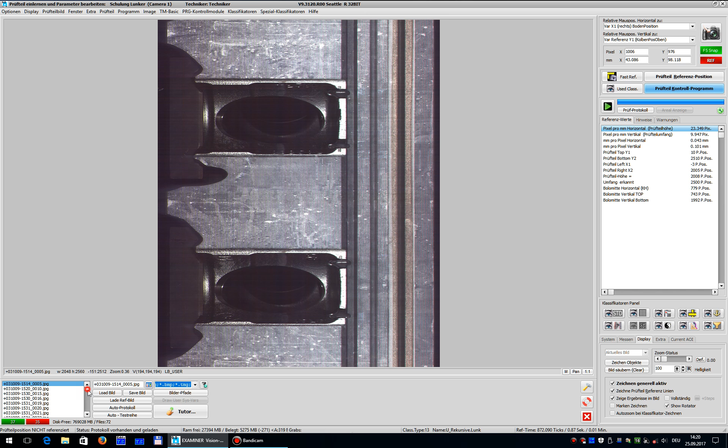Hello. In this tutorial I will show you how you teach with examiner 9 the Niring. In this case the Niring is good, he is inside the tolerances. I have three bad parts, bad pictures here in the list. I will show you the first.

You can see the Niring is not perfect. Here the Niring is very small, this is less than 1 millimeter, it's not good. In this area the ring is okay, but here you can see the ring goes outside.

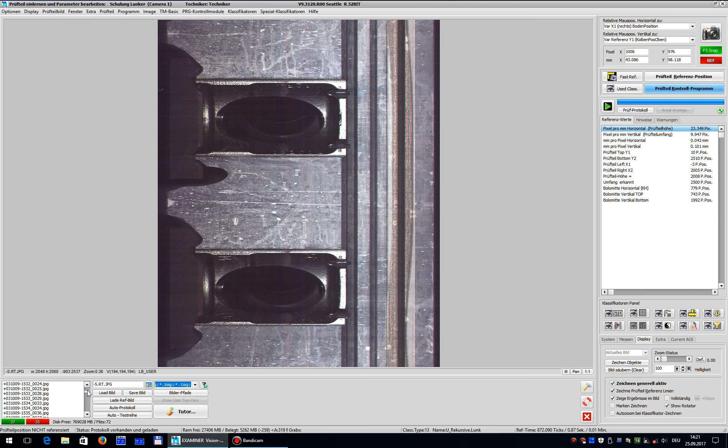Okay, the first thing you need is a good part to teach this. I'm loading a good part. In this case, in the list I have 37 good parts and 3 bad parts by Niring. First, I'm clicking to tutor.

Sorry, I'm switching to English.

Okay, I'm clicking to tutor. And here you have 3 options: teach a new characteristic, a new classifier; teach an existing characteristic, classifier already exists; and adjust existing characteristic. In this case, I'm creating a new one, teach a new characteristic.

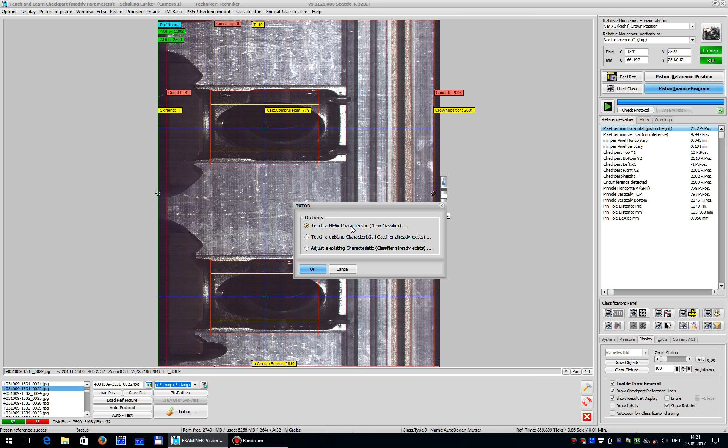Then the program asks you, is this a good picture, a good piston? The current image shows a good part. The characteristic to learn is okay, yes. The next option is the characteristic. In this case, I will teach him a Niring or Eloxal layer. In this case, it's a Niring, okay.

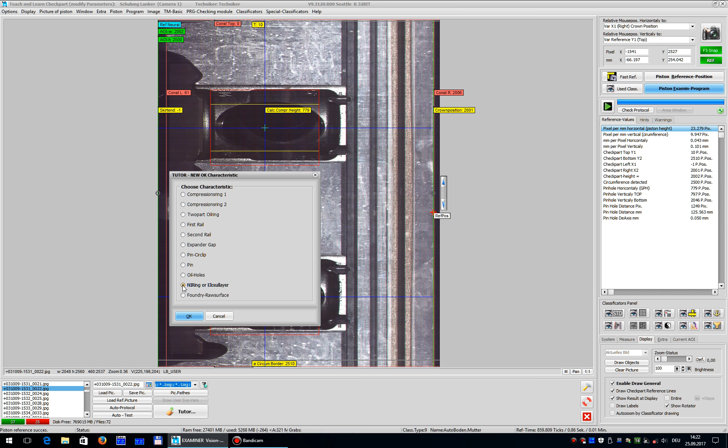And here you can see an example picture. Here you can see aluminium, here is steel, then comes the ring, then comes steel again, and here we have aluminium. And here you can see the rectangle of the receptor.

In this case, it's important that you have a little bit of aluminium by the left and a little bit of aluminium by the right inside. This is very important, because if you make this rectangle too small, then the program doesn't understand the width of the ring.

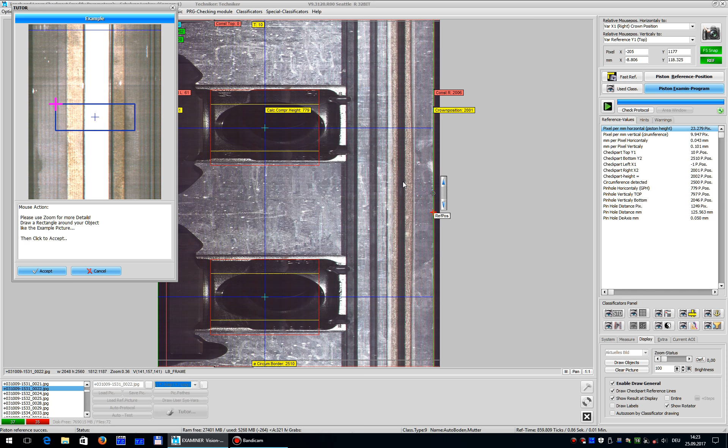Okay, I zoom in here on my picture. And here I have steel beginning and here is the steel ending. And I give him a little bit more aluminium by the left and by the right. So the ring is not exactly centered.

So I think this is very good to teach him. Here I have aluminium, in this case a little bit more, and here a little bit less aluminium, but I have aluminium here. Okay, accept this.

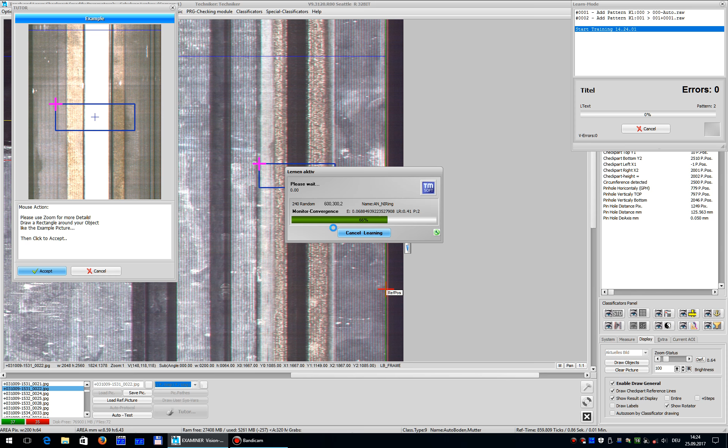Then comes the name of the characteristic, only Niring. Okay. Here in this properties window, you must not make any changes in the normal case. If you're using the tutor, you can leave all parameters and properties. Accept. The program is now learning.

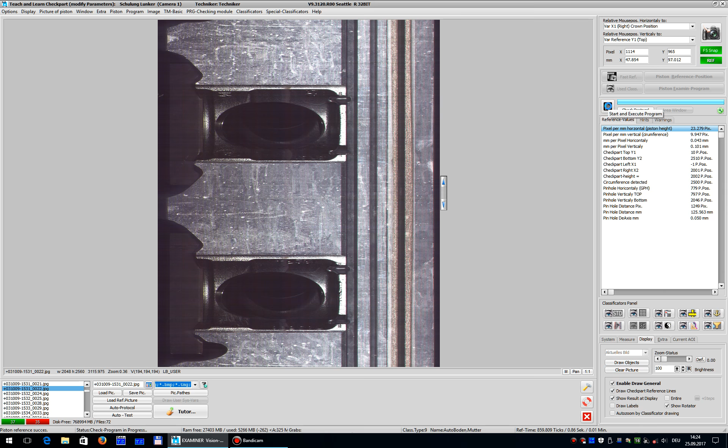And now you can start the program. I switch on drawing. And now he checks the Niring from the top to the bottom, completely around.

The classifier, in this case, I taught him with only one pattern. He needs more patterns. So what I now do is I'm loading a bad part. Loading the first bad part. And go to tutor, and in this case, I teach an existing characteristic.

I will create a new one? No, teach an existing characteristic, okay. In this case, Niring, okay.

And then the parameters ask you: the characteristic in this image is okay, or the characteristic in this image is bad, not okay. It's not okay in this image. Okay, the next question is also important: the characteristic is at whole circumference bad, or the characteristic is at circumference partwise okay. In this case, the second is correct, because the Niring is not completely bad around the 360 degrees.

In this area, for example, the Niring is inside the tolerances. So I'm choosing characteristic is at circumference partwise okay. So next, now I can move the classifier, the receptor, and in this area, this is okay. So I give him a good pattern here, positive.

The program asks you, will you teach, learn? No, first I'm giving more patterns. I move him down to a bad example. Look, this is less than 1 millimeter, this is a bad part. Add as negative. No, I'm going to the top and make it again.

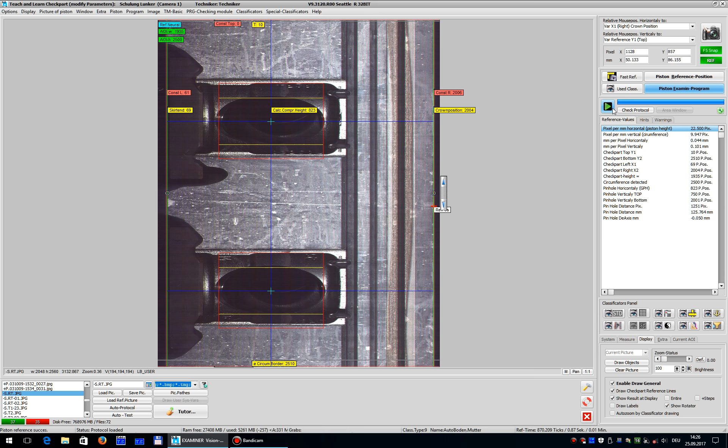Okay, so the program is ready. So next I'm checking the whole program, and you can see he said here in this top is bad, here is bad, and here he may make some mistakes. This is what I will teach him now with good parts.

This means next I'm loading a good part again. For example this one, and run the program, and he makes a lot of mistakes.

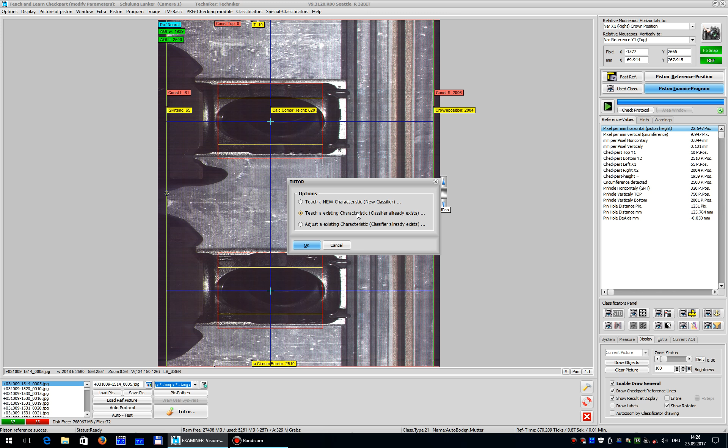Going to tutor, teach existing characteristic, in this case ring. The characteristic in this image is okay, yes, this is a good part. First is okay. And then the program learns this characteristic in this image as okay by himself.

Here you can teach it manually. Here you can say, okay, learn, all this is good. Okay.

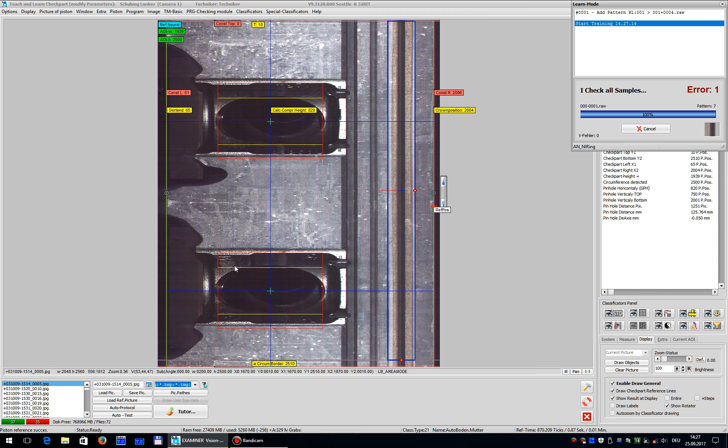Ready? Now I can try the program again. Now it works good. I'm loading another good part. Looks good. One more.

Also good. Okay, so next what I do, I make an auto test, and I say I will only check the good ones. Here you can say you will check all. In this case I will only check the good ones.

The good parts are marked with a plus in front of the name, and the bad parts are marked with a minus in front of the name. But I think you know this. I start now with only the good ones.

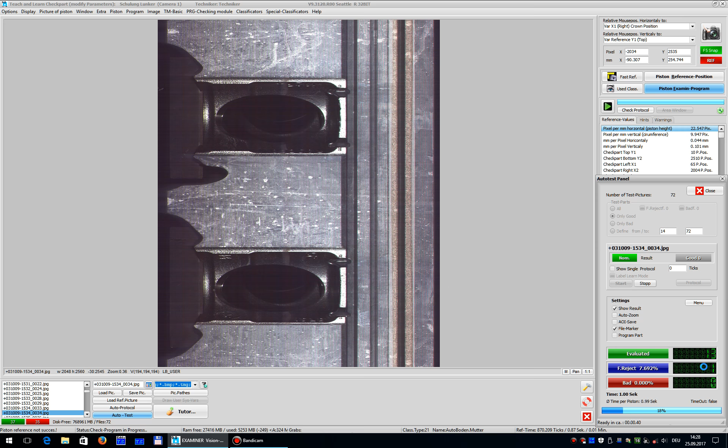And if I have by 10 or 12 no mistakes, I can break. Now we have evaluated 13. I have one false reject. False reject means a good part was rejected as bad, and false accept means a bad part was not rejected, was taken as good.

But in this case I have only one false reject. I stop the program, and here you can see in the list the third.

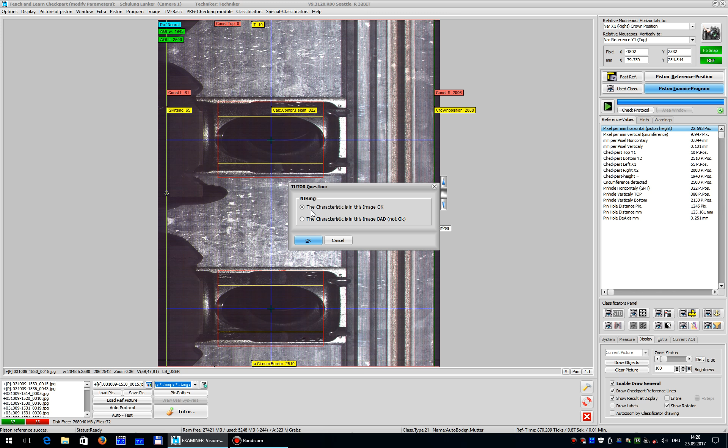Start program. Yes, he makes a little bit of a mistake here in the top. So I'm going to tutor, teach existing characteristic, ring, and the characteristic in this image is okay.

And teach by yourself, yes please. Okay, so that's all. Test again, now it's good.

And I'm sure now I can create an auto test again, but to be sure now it works, so I'm now going to the bad parts again. This is very important. This is the first bad part, and I teach him this.

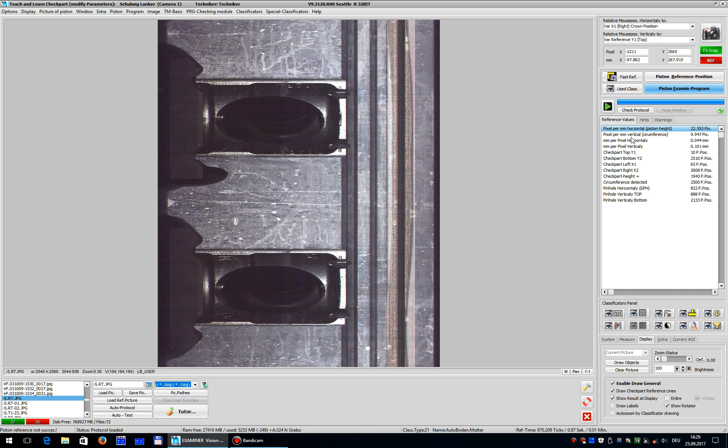He should find it, yes, it's okay. The next bad part, he never learned it, but he should find it by himself. Yes. And the third, it looks very clean here. It's okay, he found it.